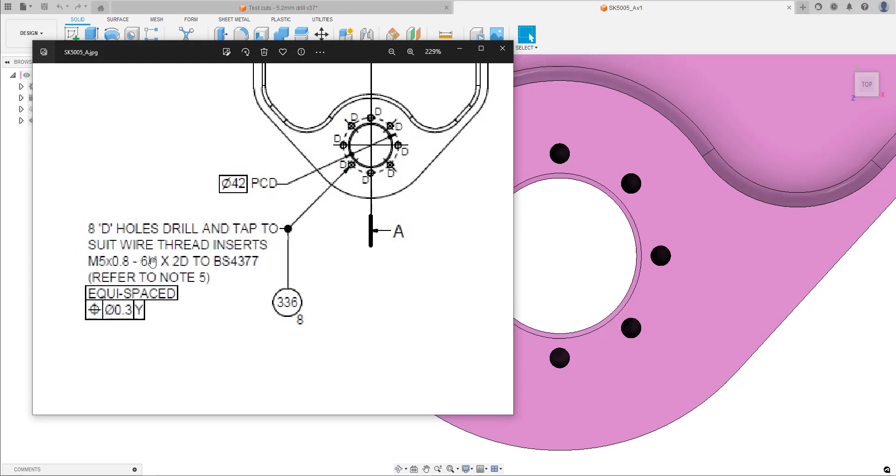If I look at the GD&T drawing, it tells me that I need to drill and tap these holes to suit a wire thread insert. And these wire thread inserts are for an M5 by 0.8mm pitch screw. So a 0.8mm is a coarse pitch. For an M5, I think a fine pitch would be 0.5mm. 6H tolerance, which is a fairly loose standard tolerance, and then that's just a British standard call out. So that's what I need to do.

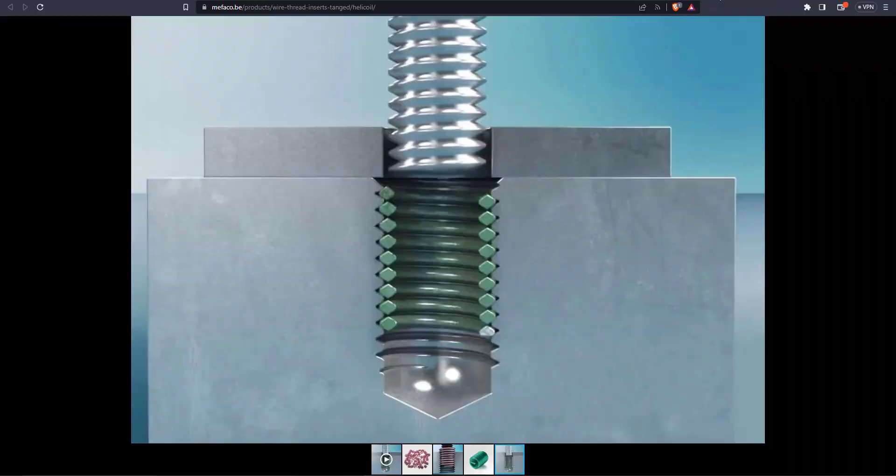So I think first of all, I'll probably do a quick explanation as to what a HeliCoil is, why you would use a HeliCoil, then why I would go about thread milling holes rather than using a tap, and then of course I'll get into how to actually program it. So where you get the data from that you need to put into Fusion 360, where you actually input that data in Fusion 360, and then a few things to watch out for as well.

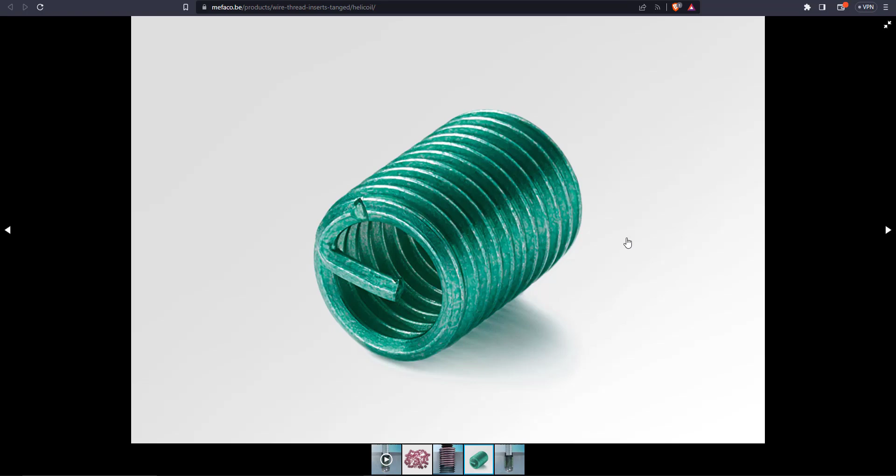So if I bring up this picture, this is actually what a HeliCoil looks like before you insert it. It looks a bit like a spring. It's not very springy, but it looks a bit like one. You have a tool that engages with this little prong at the bottom here, and you'll notice it's almost snipped off there. And what that allows you to do is to screw it into a threaded hole, and then once it's in, you get a punch, and you hammer that punch, and it knocks this bottom bit off, which allows a screw then to go right the way through the HeliCoil.

So it'll look like this once it's in the hole, without being cut in half, but that is obviously it cut in half so we can see how it works. Why would you use these? So you typically use them in softer materials like plastic, aluminium, composites, etc. And these HeliCoils are, well, I've only ever seen them in steel, but they're essentially made from a harder material. And it means you can screw a screw in and out over and over again without worrying about wearing out the thread, or if you accidentally over torque it, you're less likely to strip the thread. So that's the principle behind them, and hence why you see them in softer materials.

You'll see the pitch call out for a HeliCoil. Something to note while I've got this drawing up is that the pitch on a screw, say for instance our M5 coarse pitch is 0.8mm, is the distance between that point and this point. So for one full turn around the circumference of the hole, whatever size that hole is, the pitch is telling you how far it will drop down. So 0.8mm in our case.

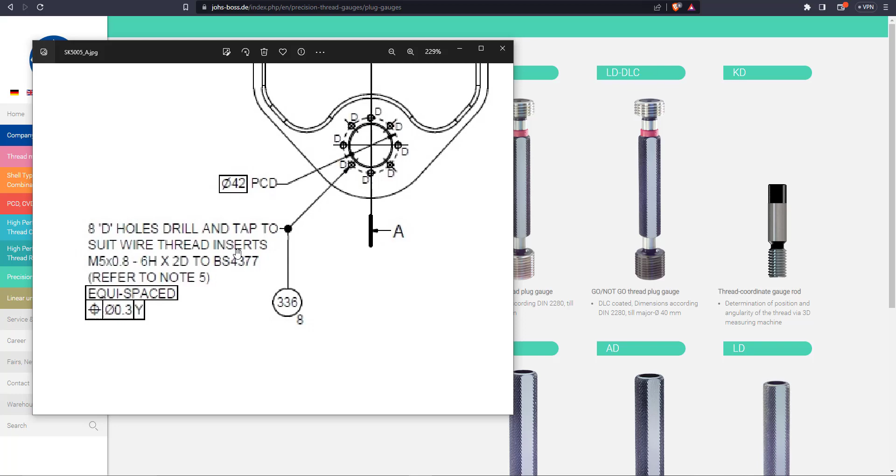It's probably useful also to point out that you measure a HeliCoil hole, that 6H tolerance that is on the call out, in the same way as you would a normal threaded hole. So you use a go no-go gauge typically. You'll see these HeliCoil holes often referred to as STIs, so that is short for to suit wire thread insert. So I think it stands for standard wire thread insert, something like that. But you'll see it called an STI, or in this case an EG.

So if you're searching for a go no-go gauge, search for STI, which stands for something a bit different where I'm from, but anyway. So the principle behind a go no-go gauge, if you've not seen it, is if the hole is undersized, this go side won't go in.

If it's large enough for the go gauge to go in, that means the hole is not undersized. But then if the no-go side, this bit with the red on it, can go in, that means it's oversized. So you want this side to go in, the go side, but then the no-go side to not go in, and that means it's within the tolerance range.

And again, coming back to CAD here, what I'll show you later on is what I'm doing here, because one of the advantages of thread mills is they allow you to adjust the size of the holes while still being in tolerance, whereas with a tap, you will just get one size of tap basically. That will obviously keep it in tolerance, but you can't slightly adjust it to make a tighter or looser fit. So that's one of the things I'm doing here, which actually brings me on to the benefits of thread milling versus tapping. So that's one of them, that you can adjust the fit of a hole while still keeping it within the tolerance range.

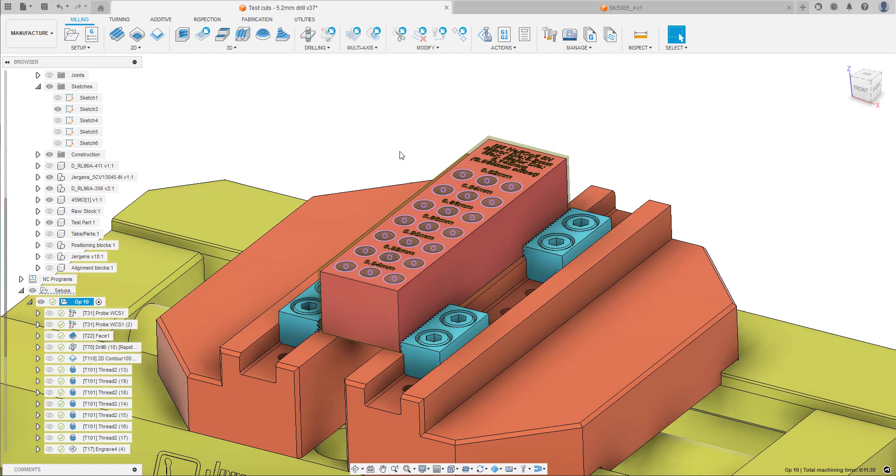That's why I'm doing this. I'm doing this for my clients. They've asked for basically as tight a hole as they can get while still being easy to insert the HeliCoils. So I'm basically giving them a range of options here. These numbers are offsets, which again I'll show you in the calculation, how we get these numbers, in a bit. But I'm showing them the different offsets, and they can basically put HeliCoils in these holes and say, okay, that one's a bit loose or that one's a bit tight, and they'll find one that works for them. And it means I'm not on the hook as well, it's up to them to decide, so I don't make a part and then they reject it.

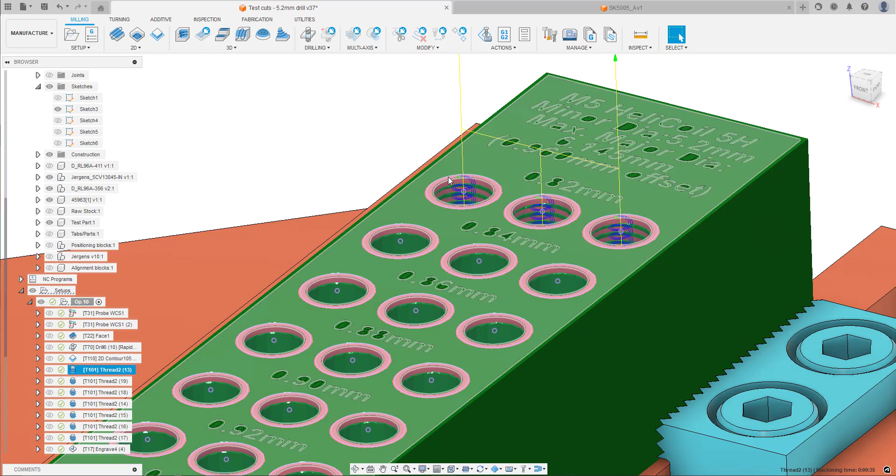So the other advantage of thread milling: thread mills, if they break in a hole, because they're using this whirling effect, so you go down into the bottom of a hole, we're climb cutting, so it whirls upwards, it's cutting clockwise basically, so that's why it has to go to the bottom of the hole and whirl its way up. If that tool were to break, you're unlikely to scrap the part. You can basically just pull the broken thread mill out and then go in with another thread mill, and it's likely that threaded hole will be fine to use.

Whereas if you're using a tap, the tap is very hard. If a tap breaks, it's basically impossible to remove without scrapping the part. You'd probably have to drill it out and then do an oversized hole and then tap it to take a larger screw than you originally intended. That's probably the only way you could save a part.

Thread mills are very versatile. That's another benefit. If I bring up the catalog, you see here I've got a single point. You can get multi-point thread mills, but I've got a single point thread mill. So here's an M5 by 0.8mm coarse thread end mill, and that will do through holes, blind holes, all sorts of threaded holes. Whereas with taps, you might have different sorts of taps for blind holes and for through holes, etc.

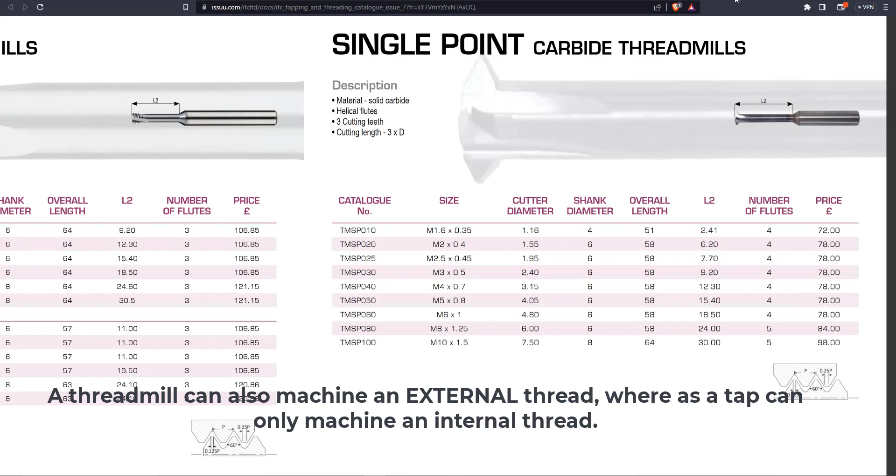So yeah, versatility is great, and they're also versatile in that you can use them in a standard collet, whereas with a tap, you typically buy a tapping collet, which you may not have on the shelf. Say I was doing a strange hole size like an M5.5, going to the expense of buying a collet for it seems a bit silly, especially if you're just doing a one-off part. So that's why a lot of people are reluctant to use taps, especially for one-off parts.

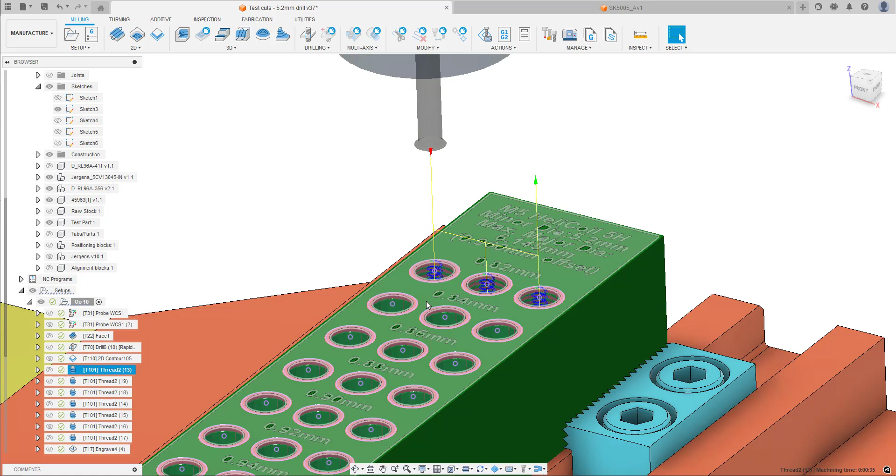Whereas this M5 here, for instance, you just buy one, it'll do almost everything you need at any point in time. Maybe not as quick as tapping in certain instances, but the flexibility is often what you're looking for. You don't have to worry about chip evacuation with thread mills because, again, they're undersized for a hole, so you can get lots of coolant in there and wash the chips out and so on and so forth.

So there's a number of advantages, and you'll actually find in harder materials like titanium that you just won't find taps because of the forces involved. You nearly always have to thread mill, whether it's an internal thread or an external thread, because thread mills work like an end mill, they're just taking a lot lighter cuts, so therefore there's less cutting forces involved.

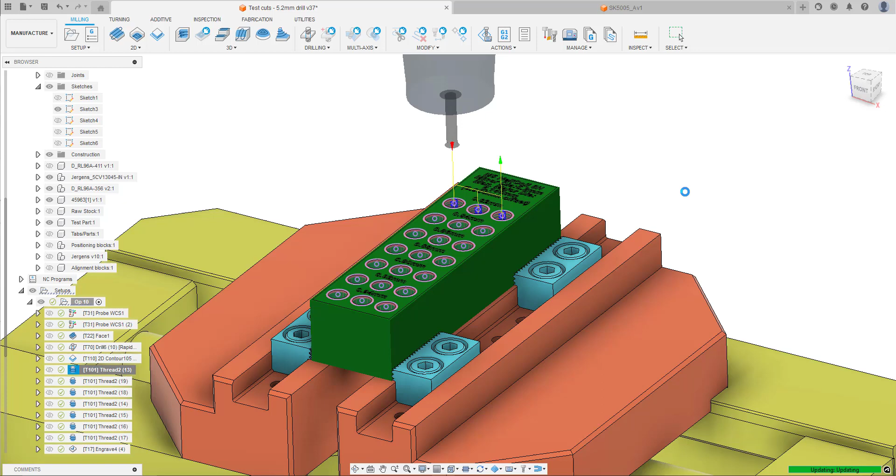So how do you go about programming a thread milling cycle? I'm in Fusion 360 here, but I'm sure these principles apply to any other CAD/CAM software. So if I click edit on this thread mill cycle, it'll take a little while to load, but what it's going to ask me for is really three or four key pieces of information. The first is obviously the thread mill that I'm going to use. That has to match the size of the hole.

The second bit is the hole, and I'll get into this later on, but it's very important that the hole you have modelled reflects what you use in your calculation. I'll show you that in a little bit. Then you've got the pitch, which is fairly standard. You just have to watch whether you're doing a coarse or fine pitch. And then the pitch diameter offset. This is the main thing that causes people issues.

So I'll close that and open up this Excel spreadsheet. Here we go. This is from John Saunders of Saunders Machine Works, his YouTube channel NYCNC. If you go on his website, you can download this. It's a really good resource, and the idea is that it allows you to get your threads right first time, because it's accounting for the tip of a thread mill.

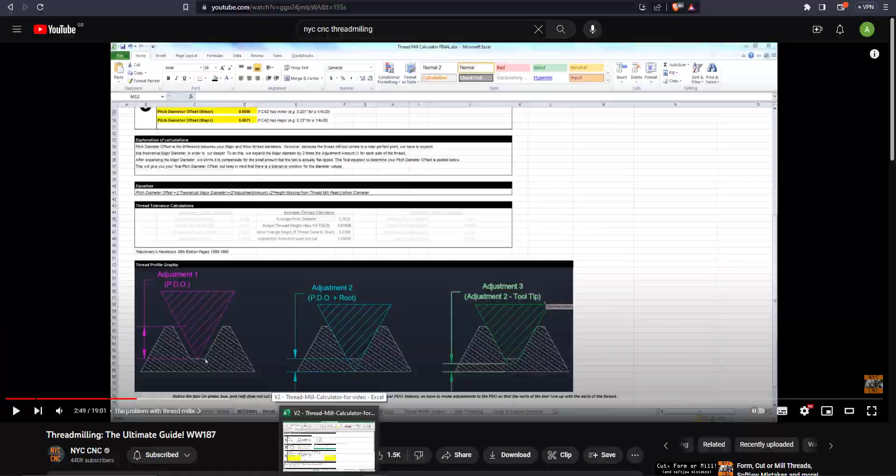I don't want to go over what he's already done, so before you watch this, go and watch his video about how he's doing the calculation and how this spreadsheet works, and then come and watch this video for HeliCoils. I'm starting off with a standard M5 thread here, and then we'll get into the HeliCoil sheets. I'll show how I'm putting the data in, and then talk about how that changes for a HeliCoil M5.

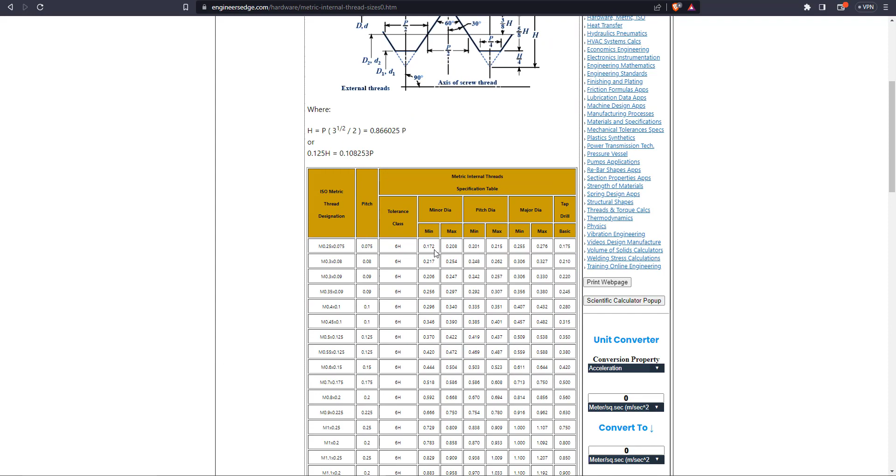So I'm going to a chart like this. These are all over the internet, and they're charts for threadmilling. They give you a range of parameters. You go down the side and search for the thread that you're using. There is an M5 0.8mm pitch, 6H tolerance. It gives you the tap drill size, so for us it's 4.2.

And then it gives you a range between the minor diameter and the major diameter. The minor diameter is basically the inner hole. Typically you would drill that, but for a larger threaded hole you might interpolate it with an end mill. Handily, it gives you a range, 4.134 to 4.334, but it actually tells you to use a 4.2mm drill here.

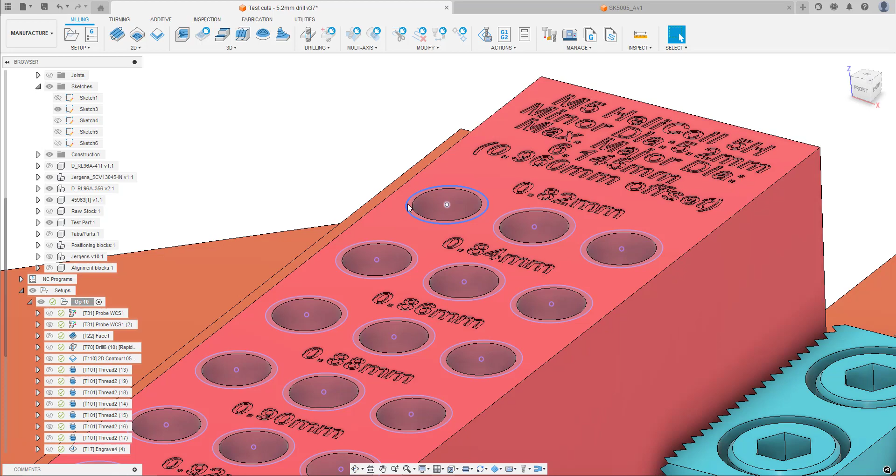Then it gives you the major diameter, which is basically where the thread mill goes out to. I've modeled it in our example here for a HeliCoil: the point on the thread mill wants to come in contact with the outside of this hole. So that offset number that we saw in this parameter is basically the distance it needs to go from this hole to get to this imaginary major diameter.

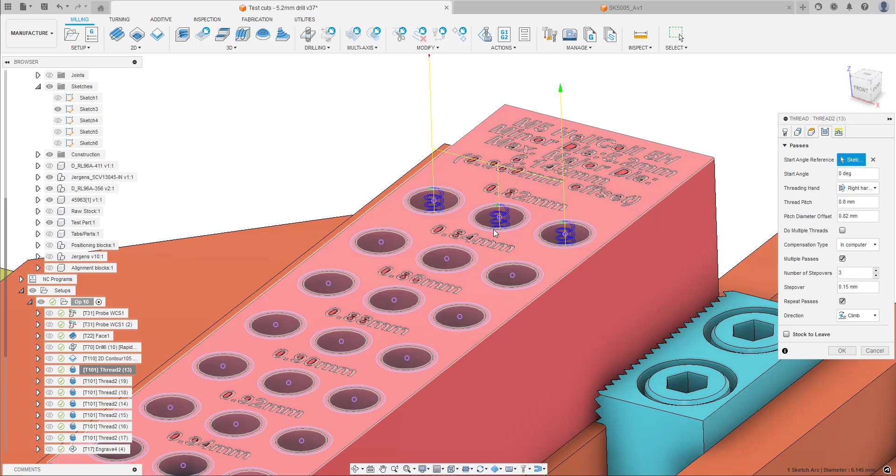So whatever this inner hole is, you have to get that right, because if that's 4, it's going to need to be more to get out to this line. That's really why it's so important to understand the size of this inner hole. So for an M5, we're going with 4.2 millimeters.

Oh, I've actually put it in as 4.3. I don't know why I've done that, but we can change that. 4.2. So what's happening here is I'm working in metric. I'm in the UK. John Saunders is in America, so he's working in the imperial system. So what I'm doing here is getting the metric numbers, then I'm converting them to inch. So that's what this 25.4 is here.

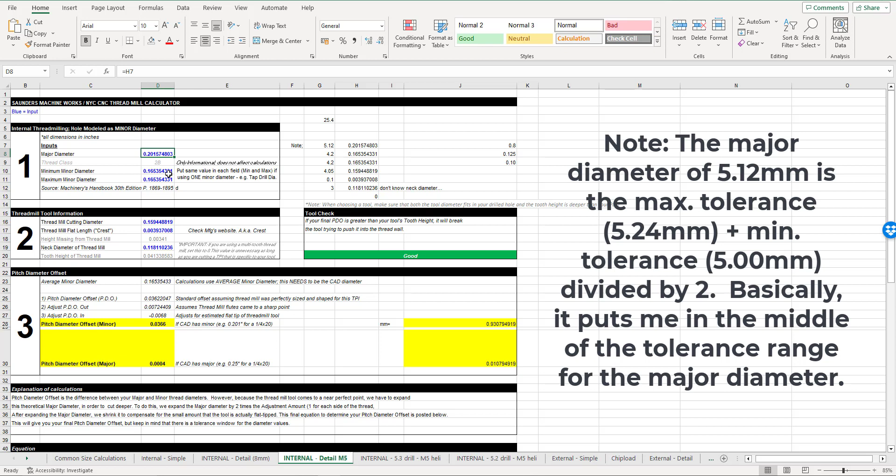So I get this measurement, and then for this box here, I'm basically saying take that number and divide it by 25.4. And then this is inserted into the spreadsheet. So you've got the major diameter here. He set it up so you have a minimum minor diameter and a maximum, but if you're drilling, they're both the same. You don't need a range, so I think he's actually overcomplicating it here.

Then the beauty of this spreadsheet is it accounts for the size of the flat on the thread mill. So what do we mean by that? They give you a cutter diameter. John Saunders explains this in his YouTube video, so again, watch this. I'm not going to go into too much detail, but basically you need this diameter, and then you also need the length of the flat.

So here it tells me 0.125 times the pitch. Our pitch again is 0.8 millimeters. So you'll see I do a calculation here. 0.8 times 0.125 gives us 0.1. That feeds into here, 0.1, converts it into inch, and then feeds in down here.

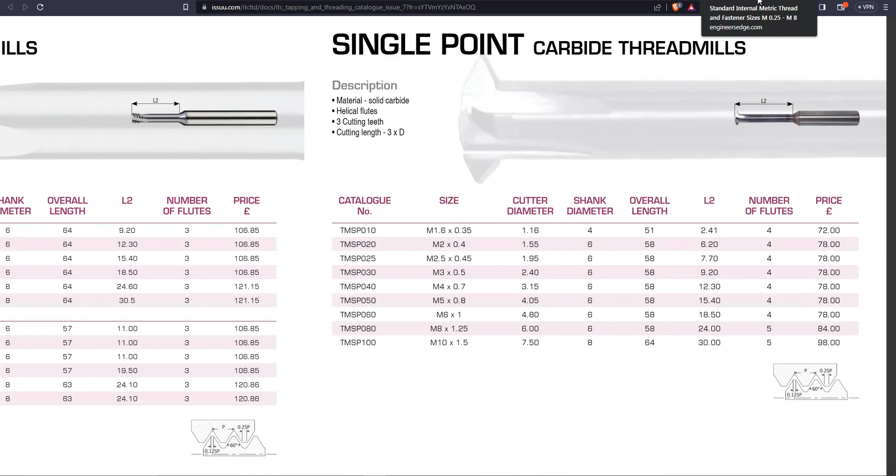So you're basically just inputting the numbers that you'll typically get in your catalog and then off the chart. So the tooling catalog, one like this. This is for ITC, good UK tooling brand. And then you'll get it off your chart as well. These charts are all over the internet. You won't have trouble finding them.

So you're inputting that data, and then what it's doing is spitting out a pitch diameter offset for you, and it's giving you a choice of either the minor or the major, and that has to do with whether you model your hole to the minor or major diameter. So if I had modeled the hole to basically be this extruded down, that would be modeled to the major diameter, so the offset will be very, very small. Tiny, 0.01 millimeters. It's giving me inch, so I'm just doing conversion to metric here because I'm working in metric.

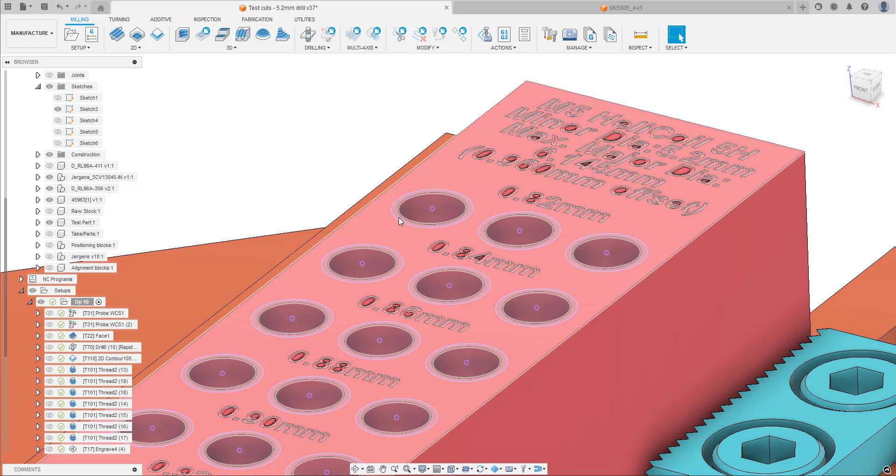So you'd get a very, very small offset, whereas because we have our hole here modeled to the minor diameter, it's basically saying, okay, we're going from this hole and we're stepping out. We would be stepping out, if we were doing a normal M5 hole, 0.93 millimeters. So going from there to there is 0.93 millimeters, and that means the outside of that thread mill is getting as close as possible to this line, which means it will almost perfectly be in tolerance.

It gets a little bit more complex with HeliCoils because the information is harder to come by, and this is why I'm doing this video, really, because I struggled to find this information. But after searching on a few forums, I found this chart, stanleyengineeredfastening.com, and I'll link to this below the video, but you can see it gives me parameters for that larger oversized hole to take the HeliCoil, and it's actually telling me that the minor diameter here for aluminium is different to steel, and so on.

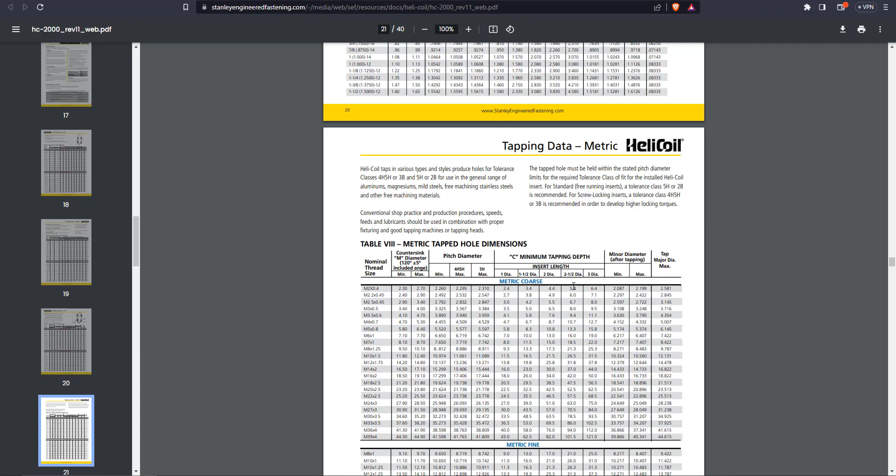So we're going to have a 5.2 because we're doing aluminium. We're going to have a 5.2 millimeter inner diameter, and then the complexity. So this is the drill specs. That's inch. Where's metric? Here we go. So M5. It only gives me the maximum. It doesn't give me a range for the tap major diameter. So I'm going to take these numbers. The maximum is 6.145.

So I've put that in here, 6.145, and then it converts it into inch, and that feeds through to here. The size of the flat that's going in down, so convert equals 0.1, gets converted here, feeds in over there, is the same. We're using that 5.2, so that feeds into these numbers. So it takes all those numbers and spits me out these two imperial measurements, which again I convert into metric.

So you can see here I have 0.96, and then these numbers start to make a bit more sense because I've got 0.94 here, and I'm basically working down. So I know that 0.94 is going to be within tolerance. If 0.96 is my maximum, if you remember, we're working with the maximum 6.145. So this number here, this offset number, is the maximum we can have. So I'm working down from that in here.

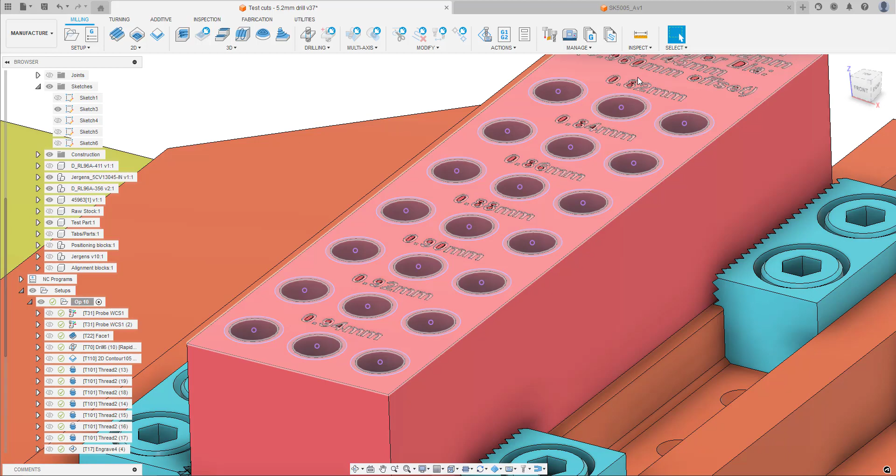So my customer, my client, is going to get this, and they can test. And I know that 0.94 is pretty much the maximum I can have while safely being within tolerance for the offset number. And then I'm working down in size, and they can decide how tight they want it, basically. So if I go to edit, you can see I've got 0.82, 0.84.

So there's not a huge amount more than just doing a standard thread milled hole. There's just these things to know, where to get the information, and that you'll probably have to work down from that maximum tolerance and find a correct fit because you're only given that maximum size.

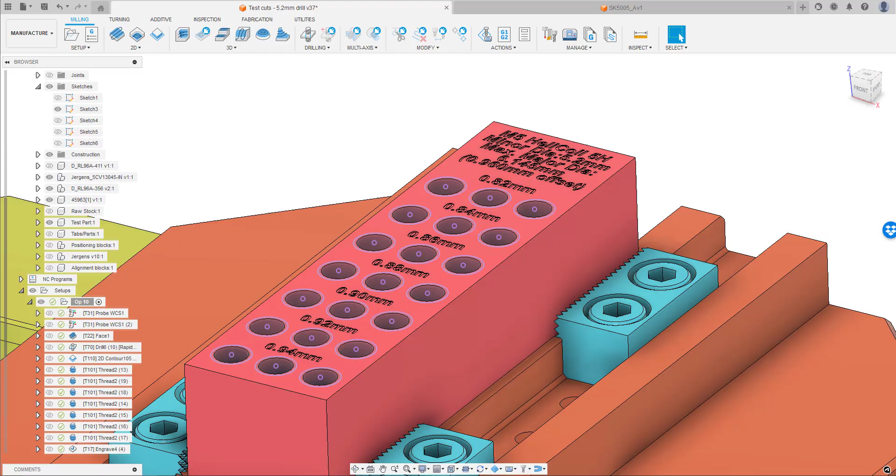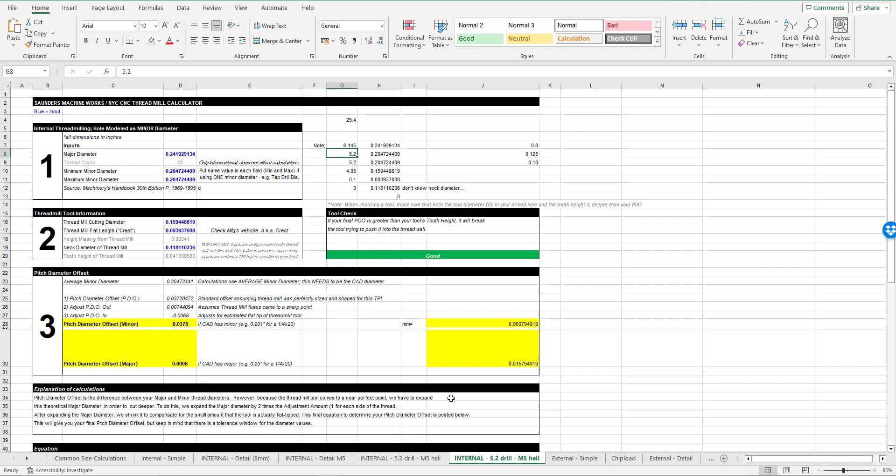Probably something to note as well, that's really important to note, is that if you look here, I have this hole modeled to 5.2. So it matches what is in my calculation, 5.2. That's really important that what you have modeled matches how you're doing the calculation.

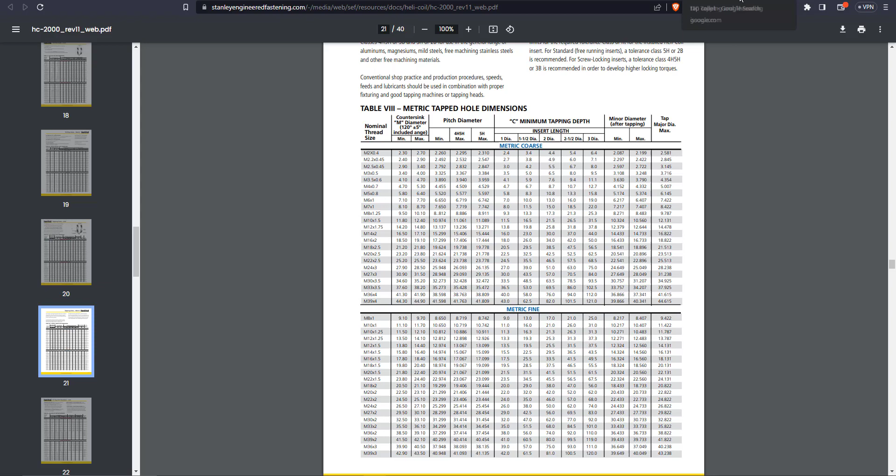So for instance, on the actual part, you'll see that these measure 4.134, so 4.134 diameter, which sounds like an odd number. But if we go back to our charts, if I can find it, which one was it? That one. So that is the minor diameter for an M5. So the minimum size for the minor diameter of an M5 thread.

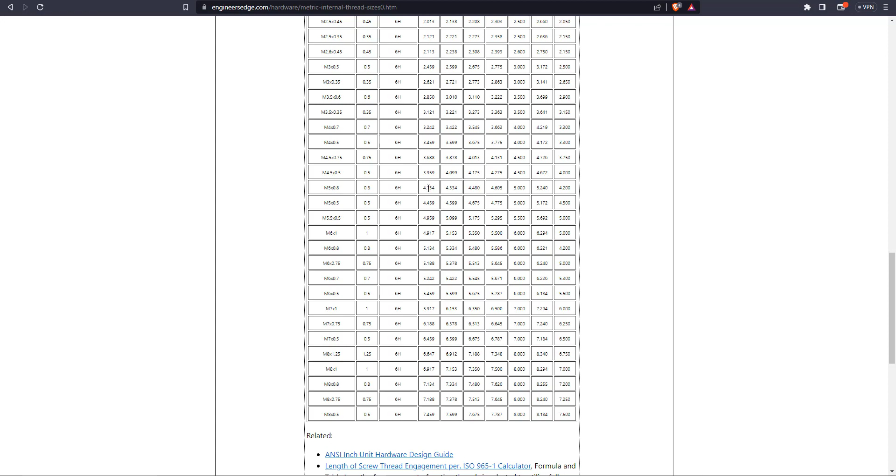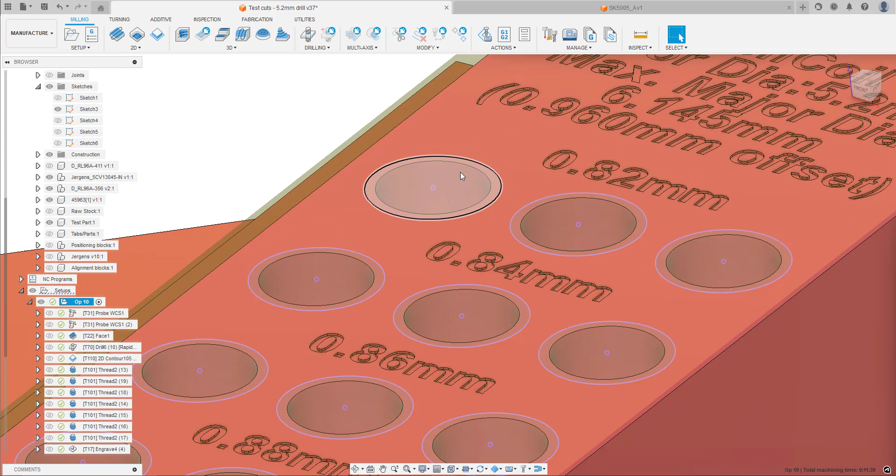So if I'd just gone in on this hole and said, oh, I'm going to go in with a 5.2 drill, but not accounted for the fact that the hole I'm modeling off is the wrong size, then my calculations would have come out wrong, because Fusion isn't smart enough to recognize when this hole is undersized. This hole could be 10 millimeters, it could be 3 millimeters, and it's just offsetting from that hole outwards to this kind of imaginary line, however much you tell it to.

That's all it's doing. So your hole here must match whatever you've got in your calculation. So that's really important to know. And from the videos I've watched, I don't think they make that point very well. So yeah, you can actually have that hole modeled to whatever size you want, but just make sure it's matched in your calculation.

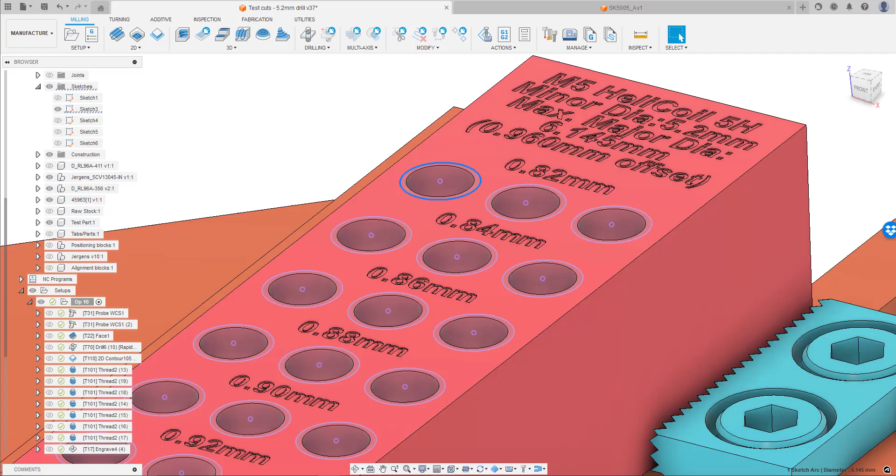So I could say, for instance, I didn't want to mess with my model here. I didn't want to tamper with it, or even if I wasn't allowed to by the customer, I had to not tweak it at all. And I had to use that measurement of 4.134. Then I would still obviously go in when machining with a 5.2 millimeter drill, but I could change this measurement to 4.134. Ignore this wrong tool thing, and it would give me a different offset.

So yeah, you still drill with a 5.2 millimeter, so ignore this wrong tool thing, because that basically thinks there's going to be a collision with the neck, because it thinks the hole is too small for how far you're offsetting. So it's another good feature of this spreadsheet, but we're obviously going in with a 5.2 millimeter drill, so we're going to have more clearance than this thinks we have. But it's telling you, if you do your calculation from that, you're going to need to offset it by more. So just bear that in mind.